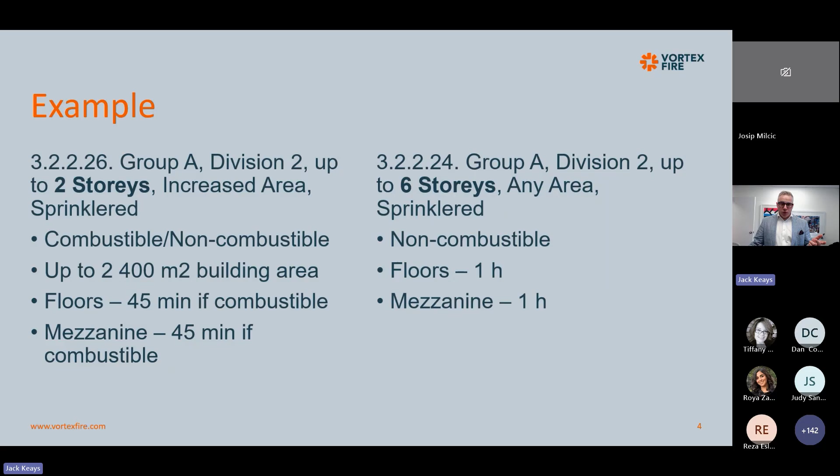Whereas if that mezzanine level was actually classified as a story, it would put us into 3.2.2.24, which would mean we'd have to do non-combustible. It might be okay, it might be doing that anyway. And the floors would go up to 1 hour, and the mezzanine would also go up to 1 hour. So it's an increase in the fire resistance rating.

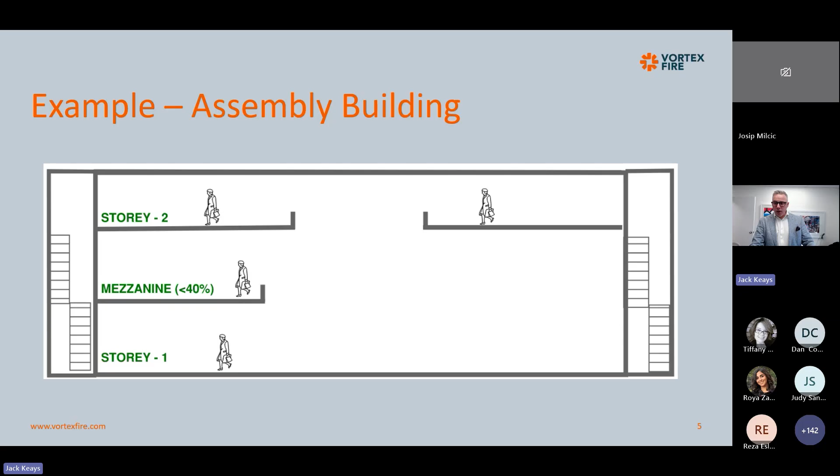Also, this gives us the interconnected floor space consideration. If you have a floor area like this, and we've talked about interconnected floor spaces in different presentations, one of the things that can happen is if you have more than 2 floors open to each other, you'd trigger the interconnected floor space requirements. In the new OBC, that would be quite significant if these were considered stories rather than a mezzanine. Then you'd end up having to do all the protection of the stairwells and all the different things we've talked about in that presentation - it's available on YouTube if anyone wants to go back and look. That's an example of why, as designers and builders putting these buildings together, we would actually try to classify an area as a mezzanine.

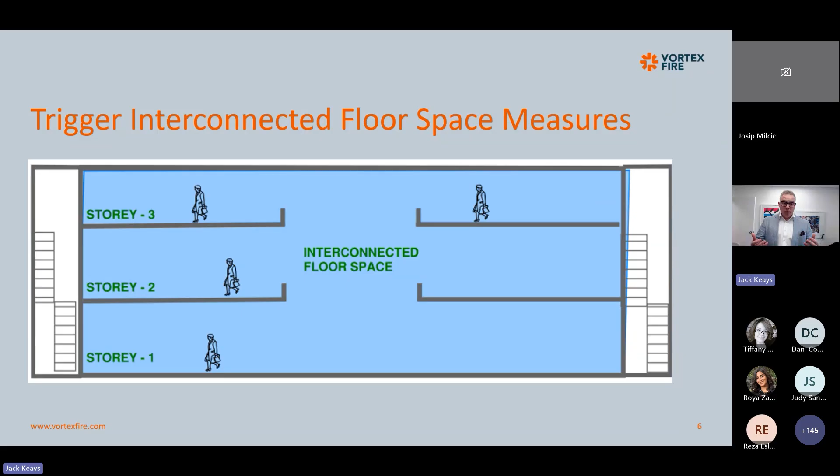Okay, so we talked about the pros and cons. The pros are the reduced fire rating, the permitted combustible, non-combustible construction, and no interconnected floor space protection. You could potentially get rid of those or reduce those.

But the cons are we are limited in areas: 40% for open mezzanines, which we'll get into, and 10% for enclosed. One of the key things is you actually have to be able to see the floor area below. So there are limitations on what we can do, but it does have some upside.

We'd often see these, for example, in restaurants, mezzanine levels in restaurants. You can add it into a building without increasing the height of the building in terms of number of stories. It's very common in industrial applications where you may have office areas that are subsidiary to the industrial space that actually don't trigger the requirement to be a story in building height as well.

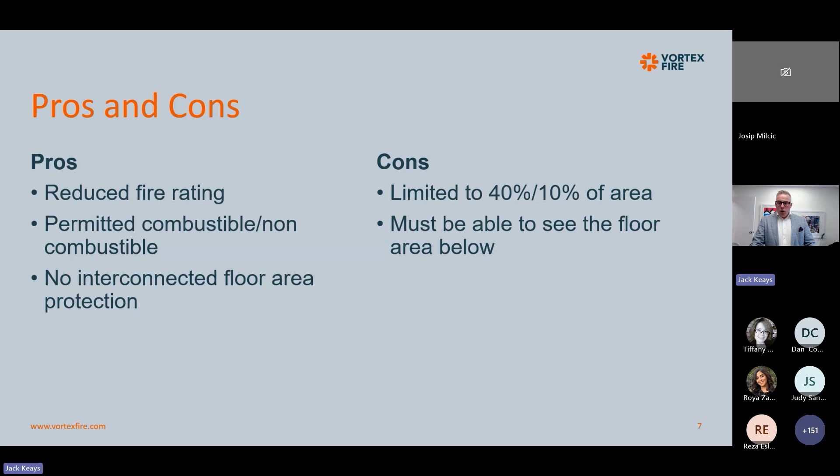Okay, so with that, we're only 8 minutes in, but Tiffany, can you run the first poll on this? So the first poll question is: what are the main benefits of classifying an area as a mezzanine? There are 4 options: reduced construction requirements, potential reduced exiting requirements, doesn't count as a story in building height, or all of the above. Please choose the most correct answer. I'll give you about 30 seconds to do that.

And Tiffany, if you can let us know how we're doing. All right, folks, please complete that poll on your screen. Right now, it looks like the answer with the most responses is at 88%. We have all of the above. Yeah, excellent. Okay, very smart group here today.

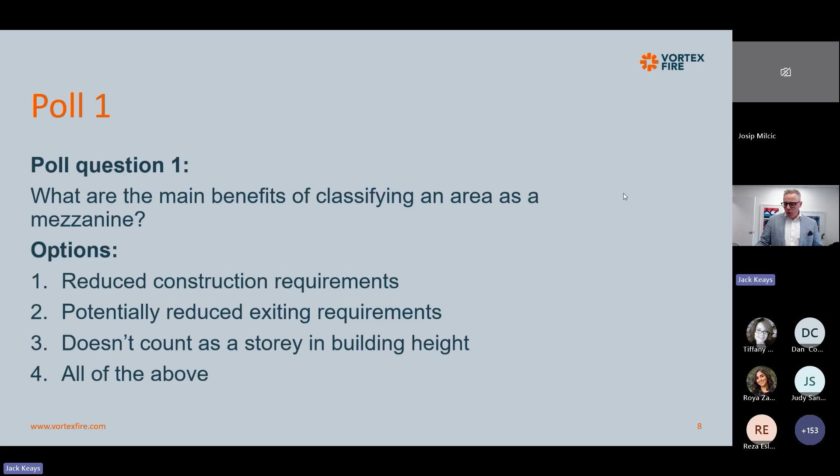Okay, so what is a mezzanine? We just want to talk about some of these definitions before we get into some of the nuts and bolts of the changes. And for anyone, maybe there's some young designers or new designers new to the industry on here as well, who we'd want to talk to, I'll just explain what this is.

So when we say floor area, this is important because when we get to the definitions and how we measure floor area, it's actually the perimeter of a building. So it's between the exterior space, the whole perimeter of a building. When we talk about this, for example, in some mezzanines we base it on floor area, in other ones we base it on the size of a room. So this is one to be aware of: it's the whole perimeter of a building.

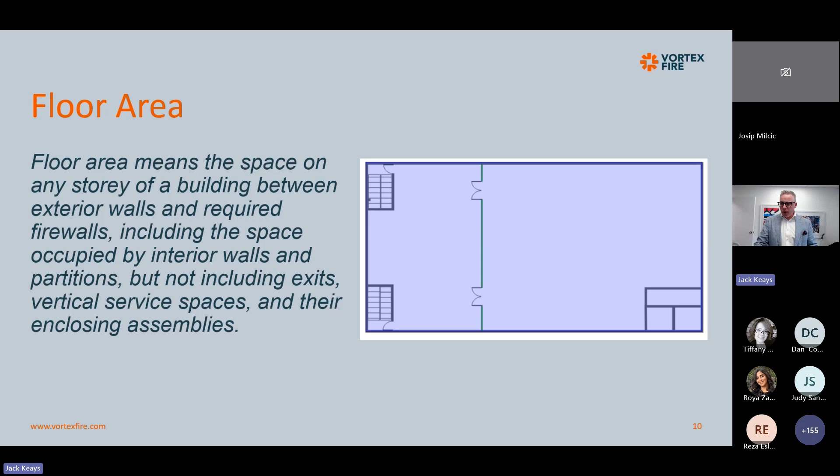The next one is in terms of suites. Suites comes up as well, so we want to talk about suites. A suite is, for example, say a whole group of offices or a strip mall situation where each one of these is an individual suite, because there are limitations on how we can arrange suites with the mezzanine requirements as well.

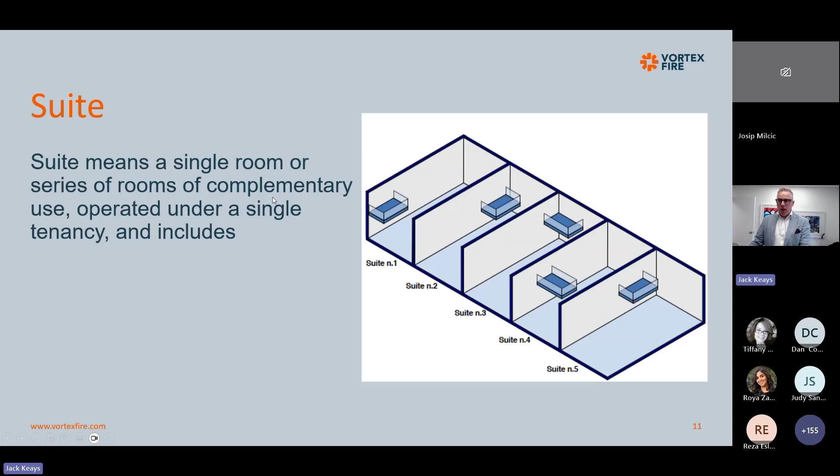So this is just some of the background, so that allows us to kick on and talk about the actual mezzanines themselves. It comes down to 2 key things: there are open mezzanines and closed mezzanines. For example, an open mezzanine is 40% of the room it's located in. A closed mezzanine is 10% of the suite.

So that could potentially be the whole floor area of a building. For example, if you have a large industrial building, it's 1 tenant, 1 suite, so they will get the whole 10% from the whole suite, whereas the open area is actually the room it's located in.

It talks about, for example, an open mezzanine. It's the aggregate area, so you can have more than one mezzanine in a room that's not superimposed, and it does not exceed 40% of the open area of the room in which it's located. This is very important for open mezzanines, to understand that it's the open area of the room they're located in, not the entire building.

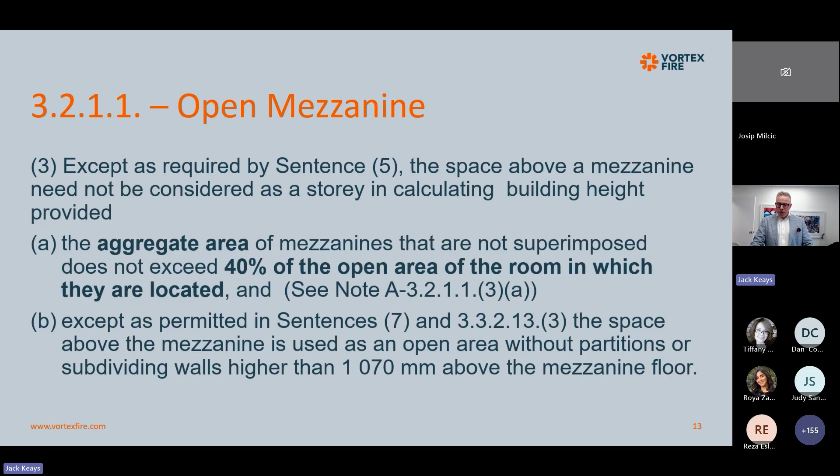The other restriction is that you can't have any obstructions that are more than 1070, which matches up with the height of a guard, between the floor area of the mezzanine and the floor area below. So that's one of the restrictions: when you want to do an open mezzanine, you have to be able to see the floor area below.

So this gives you an example of what a mezzanine would look like. You're standing on the level above, you're able to freely see down and understand what's happening. This is part of the code allowance to do this, where you can fully see what's going on. If something happens on the floor area below, you're made aware of it very quickly, and you're able to egress off that mezzanine.

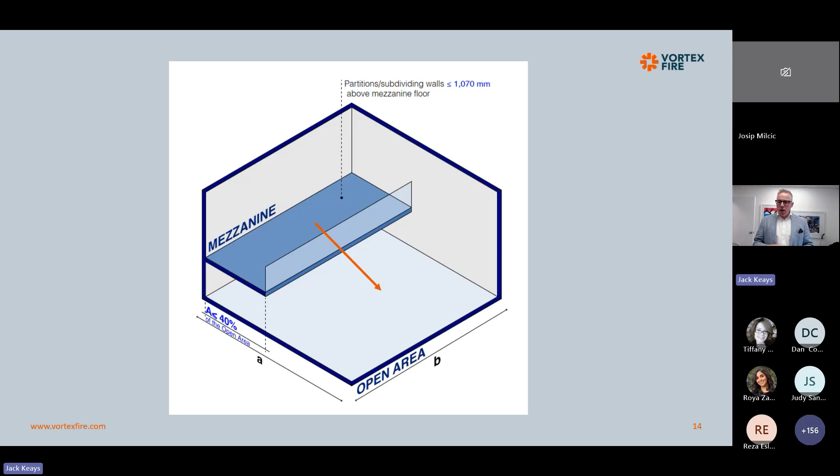So this is 40% of the area of the room. This is when we talk about having multiple mezzanines. You're actually allowed to have more than one mezzanine within that room, however the total still can't go over 40%. It's still limited to 40%, but it's based on that room alone. You can have 10 mezzanines, or one big one, do whatever you want, just can't go over that 40%, and they have to be open.

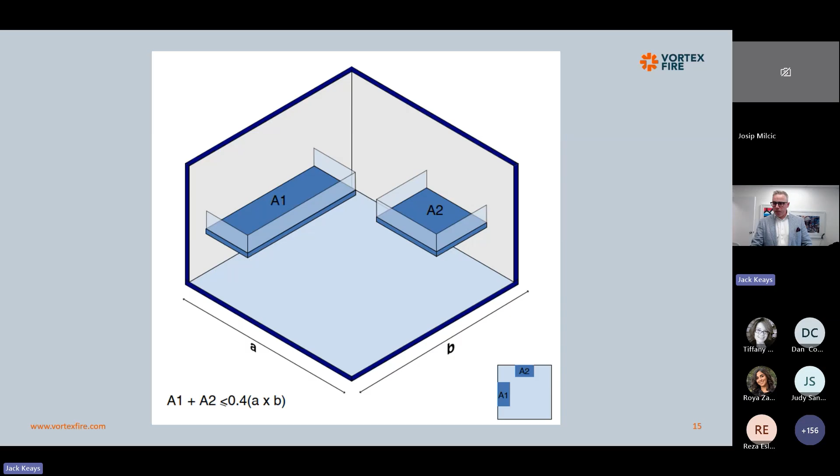So then we get down to the closed mezzanines. These are a small bit easier in terms of construction because you're allowed to have walls. However, you're not allowed to exceed 10% of the floor area of the suite.

So it's the same thing again, the aggregate area of the mezzanines. You can have more than one closed mezzanine, not superimposed, that does not exceed 10% of the floor area in which it's located. This goes back to the floor area I mentioned. For example, if you had a large industrial building, you could take the whole 10,000 square meters, and take 10% of that. Now that would trigger another issue, which we'll go into.

But the other one is the area of the mezzanine is based on the suite. So two things: if you have more than one suite, it still doesn't allow you to take all the area from the other parts. It still can't exceed 10% of the suite.

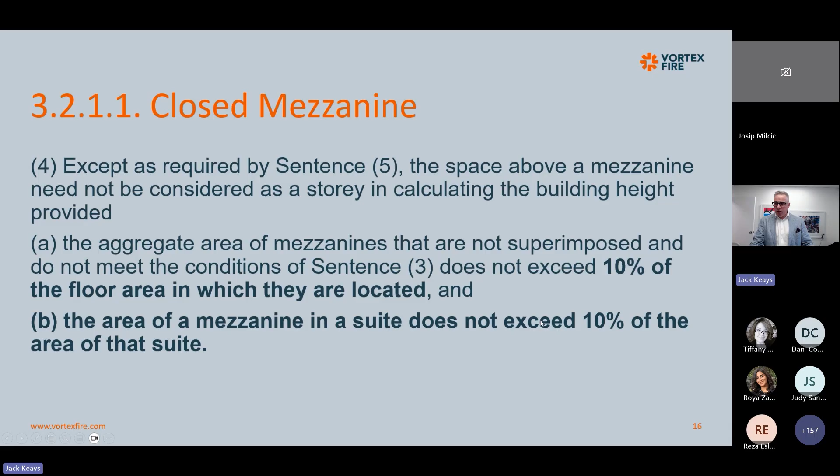So this would be an example of a closed mezzanine, and the reduction in area corresponds with the reduction in actual visibility. The code says, hey, you can't see down, but still only get 10%, since it's not as risky as having a full story. So we're going to give you some dispensations. However, you're only going to get 10% of the floor area because you can't see down.

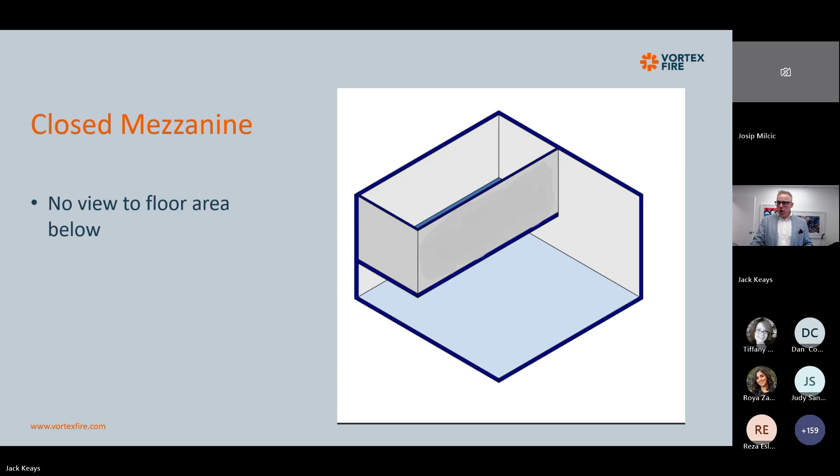And then we get into this example, which is the situation where you have multiple suites. We've dealt with this a number of times where you might have individual tenants in, say, retail or office spaces, some condominium offices, things like that. And they would come to us and say, hey, I want to put a mezzanine in.

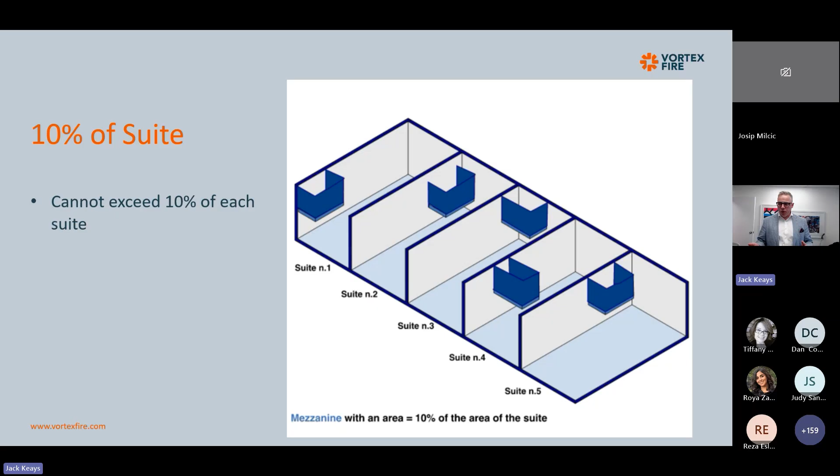No one else in the whole block has a mezzanine. Can I have 10% of the whole area? And we're like, no, unfortunately, you can't. It's still limited to 10% of the suite in which you're located. You have to follow that. So this is where it comes in: you can have one in every single unit, just not an individual unit taking more. It also allows for, in the future, if anyone comes in or out, that they're not limited by something being taken by another unit.

This is the same example for our large industrial buildings. We mentioned that in large industrial buildings, if you've only one tenant, it would be 10% of the floor area. This could be a situation where throughout the building, you might have different supervisory offices, for example, over some of the production space. You might have even service rooms, different things, or other space. So they can't exceed 10% of that floor area, but it's based on the entire footprint of the entire building.

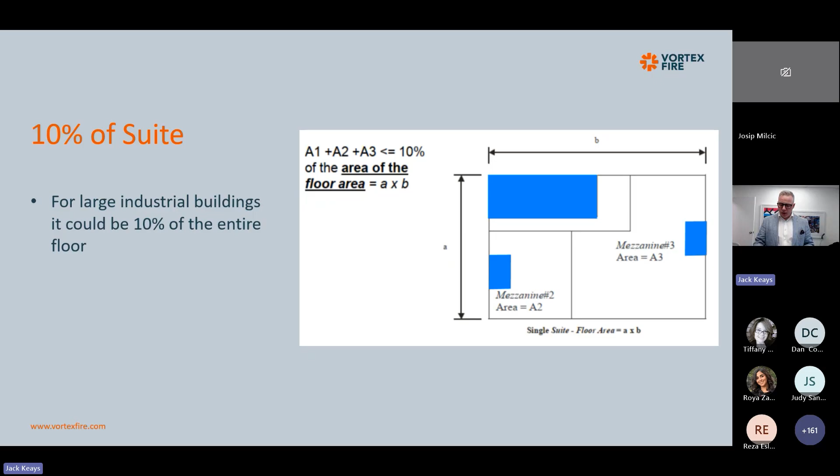Just one thing, when we talk about superimposed mezzanines, you can't do one mezzanine above another mezzanine. In this situation, the mezzanine above would be considered a story, or one of them would definitely be considered a story, because you can't do one above another. It doesn't allow you to tier them up that way. So let's just be careful with that. I don't think I've ever seen anyone try to do it, but it's in the code, so someone must have tried to do it.

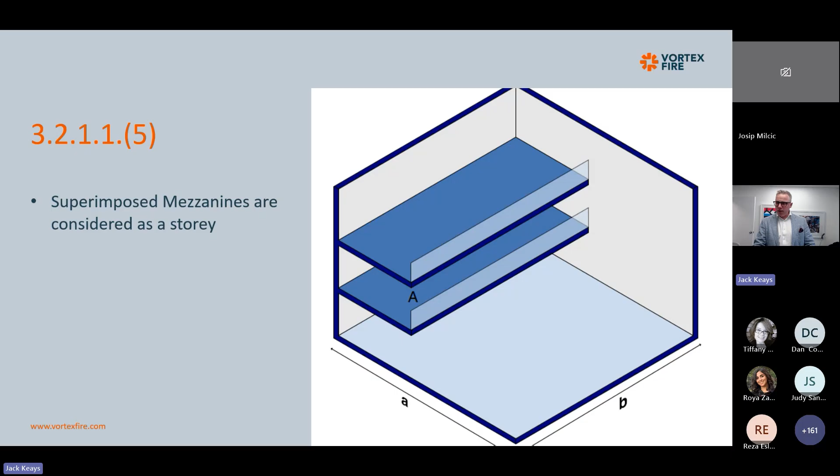So this question, guys, goes back to some of the fundamentals of what a mezzanine is. If a floor area has full height walls, so floor to ceiling, and is more than 10% of the area of the suite in which it is located, can it be classified as a mezzanine?

All right, folks, if you can please submit your answer using the poll. Just giving it another couple of seconds here. Right now, the strong winner is sitting at 86% no. Okay, very good.

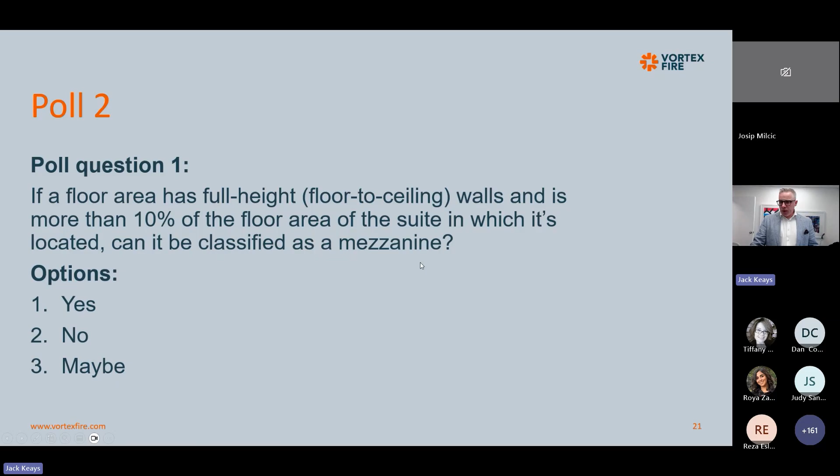Okay, so we're going to get into it now. So what has changed with the OBC? As we've mentioned in previous sessions on changes to the Ontario Building Code, a lot of the changes are about harmonizing the Ontario Building Code with the National Building Code of Canada. For a long time, we had many made-in-Ontario specials, different things that addressed different issues or were left over from previous codes. So what's happened is the harmonization has taken place. We've taken all the National Building Code requirements, however, they're a bit different from time to time from what we did before, so we have to adjust.

We've had to adjust with some of the other requirements that we've run through already on interconnected floor spaces and things like that. And this is one where we've got a little adjustment to make as well.

So one of the key changes, this was brought up in the interconnected floor space discussion as well, was on the actual new requirement that says that if you go over 500 square meters in a mezzanine, you have to enclose it. So where this could impact you is if you were planning to do an open mezzanine, but next thing you hit 600 square meters, it doesn't matter, you have to enclose it.

That sends you back into a loop where now you don't have the view to the floor below. So you actually don't meet the open requirement and you're back in an enclosed requirement. So it's just something to remember that once you hit 500, you have to stay under that to not have to enclose it. So you could end up triggering some of the requirements to actually be a floor or a story in building height if you go over this area. So it's something to be aware of.

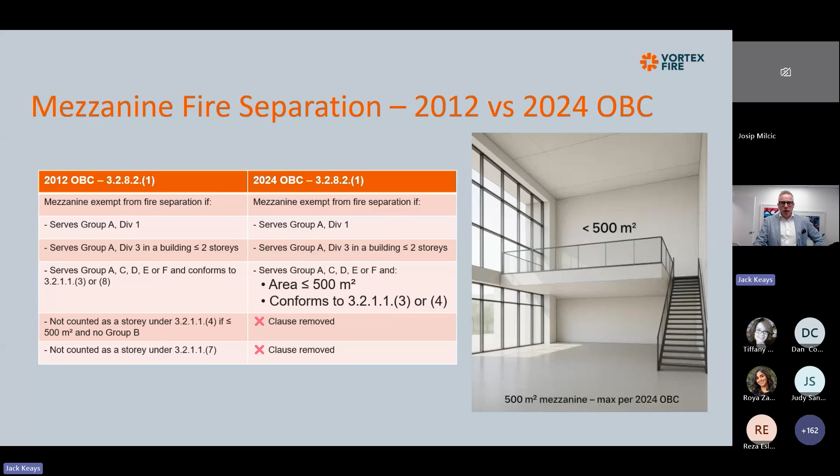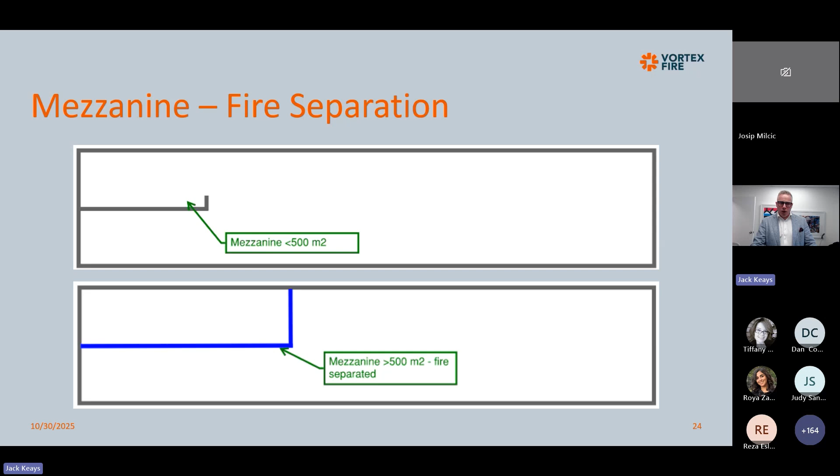So this is the example. Under 500 square meters, you're fine, you're good to go as an open mezzanine. Over 500, no matter what you do, you still have to enclose it. So this would come up mainly, this size of mezzanine would probably only be seen in industrial applications. We don't come across too many of these in other office or assembly buildings.

So that's the impact for designers. So we get into this, this is where the main changes actually happen. This is in 3.4.2.2. I put the previous OBC and the new OBC beside each other just so we can get some understanding of some of the changes. In terms of how the code looks at this, they've changed the wording of sentence 1, but there is actually no particular fundamental change in this sentence. What they both pretty much say is that if you have a mezzanine, the mezzanine should be provided with exits the same as a story, unless it meets any of the exemptions. So it's like follow the standard floor area or story requirements unless you meet the exemptions.

So, for example, this is what it would look like. No matter what size your mezzanine, the starting point would say you need 2 exits. You need to meet travel distance, all that.

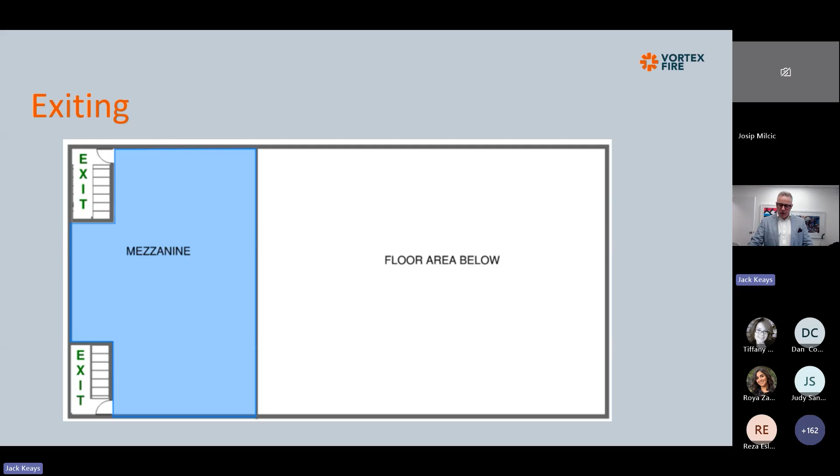You measure travel distance to the exit door as typical standard requirements for this. That's your starting point, and then you start to peel back that depending if you meet the exemptions or not. So the next sentence has got this - it's actually taken out. This was the exemption before that said it waived sentence 1, and it's gone out of the new code. The previous code said a mezzanine need not conform to sentence 1 provided it does not require to terminate a vertical fire separation. However, when you went back to the vertical fire separation, it didn't have the 500 square meter limit - it only had the 40% and 10%. So this has actually gone out of the code. It's a bit of a change in terms of how we do it, but it is what it is.

So we're going to move on with it. In terms of this, this is the biggest section that addresses exiting, and this is 3.4.2.2 sentence 2. Within this, it talks about one of the exemptions of the means of egress, and we're going to go through them one by one. There's the actual area, which we just mentioned. There's the occupant load, the actual area of the mezzanine, travel distances, and how we measure those travel distances.

For this example, the means of egress for the mezzanine need not conform with sentence 1, provided the mezzanine is not required to terminate a vertical fire separation. So we're going to assume our mezzanine is under 500 square meters, which we've discussed.

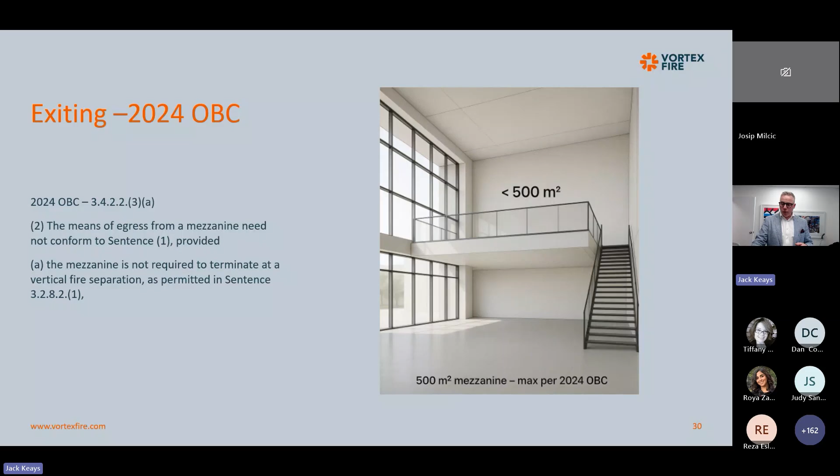The second one is a bigger one - this is a new one. If you go over 60 people, you don't get the exemption. Unless there's an exemption further on, but at 60 people, you can't just use the open staircase like we were able to use before. You have to actually go ahead, and there will be at least one exit on the floor area.

The next one is the actual size of a mezzanine. So you'll see this - this is a reference to table 3.4.2.2. A means of egress is allowed to have reduced exiting, for example it's allowed to use open staircases for exiting, provided it meets the area limitations of table 3.4.2.2. This table, in my opinion, is very, very restrictive. The actual areas in this, by the way, match up with what we'd be allowed to have in an unsprinklered room - they're the same size areas.

So, for example, an assembly space of 150 square meters - that's actually only 15 by 10 meters. It's not a very big space. Might be okay in some small infill restaurants, but in the bigger scale things, it's not a lot of space. Residential, we don't typically see many mezzanines anyway. Business, we might see them more often at 200 square meters, so that's quite a small area as well.

And if you think of the large industrial application, that would be very easily eaten up at 200 square meters, 2,000 square feet. Mercantile as well - it might be okay if it's smaller units, but in bigger units, the same. And then the industrial applications as well. Typically, when we work on large industrial buildings, they're much, much bigger than this, and therefore would not meet the provisions to be allowed reduced exiting.

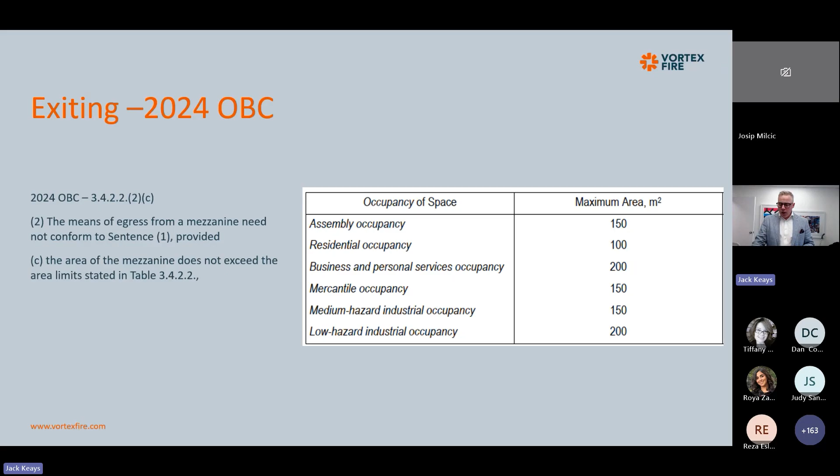So that's one area. The second area is the travel distance. Within the travel distance, it's the same thing again - they've given us new limitations on the travel distance. The limitations, again in my opinion, are incredibly restrictive. 15 meters is very, very short, especially if you think back to the restaurant example.

Take a restaurant, and 15 meters will get eaten up pretty quickly once you start going around tables and obstructions. Residential, not so much. Same with office - 25 meters is also not so bad for office, but it's still pretty short. And anyone at 10-15 meters, like 10 in a medium hazard industrial - most manufacturing facilities, for example, would probably fall into medium hazard if they're dealing with plastics or things like that. So your distance is very, very short in those cases. You're really going to trigger having to go and actually put in some exiting, more like a floor area exit, and not the reduced requirements we would have seen before.

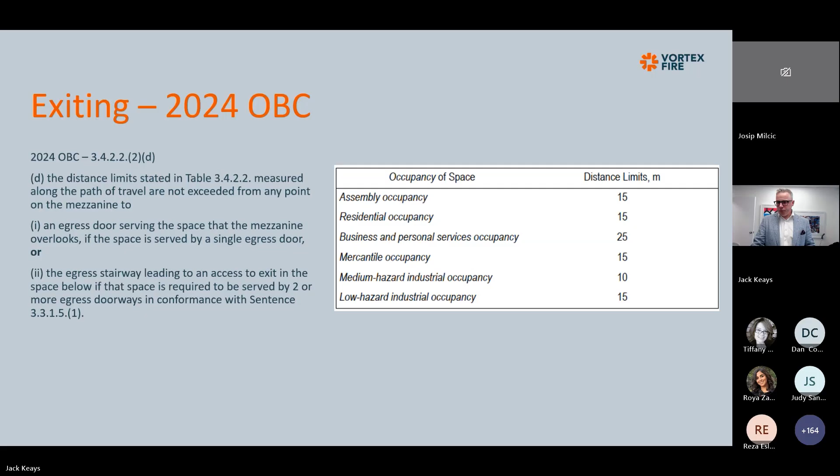So then we get into how we actually measure in these situations. We go back to the measurement of how we treat the distance out of the space. This talks about when you only have one door from the floor area. So if you've got a mezzanine within a room with one door, remember I mentioned that if you're in an assembly space, you only have 15 meters. So now, based on only having one door, you only have 15 meters from the back here, across, down, and out of the space. That's probably not going to get us out of the space.

Realistically, most mezzanines we would deal with would be a lot bigger than that. Unless you were bringing people down the back and sending them out the back, you might be okay. But in general, this would be very, very tight for most of the types of buildings we would see. So that's a very restrictive requirement as well.

So typically then you'd end up with a situation where you're allowed to actually measure to the top of the staircase, which is what we would have done before. We're allowed to measure to the top of the stairs, but we still have our two doors now, so that's a bit better. It gives us options to go left and right, two directions of travel once we come down. That does help, but it just means you have to have at least two exits from the room in which the mezzanine is located.

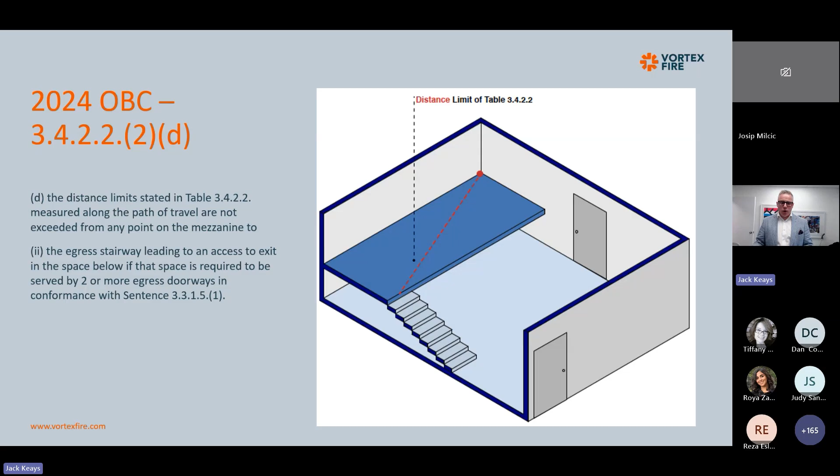Realistically, if we're going over 60 people, we're going to need that in the room anyway, which probably in an assembly space we're gone over. So maybe it's not that big of a deal, but it's just something to remember. Maybe in office spaces, it's not quite as clear cut in terms of that area and having those second means of egress.

This gives you an example. If we're dealing with a very restrictive travel distance, such as assembly occupancies, you may end up having to add a second open stair. Now you're still limited to 60 people, but this would help you meet the travel distance, and would also allow you to get the area a bit bigger and meet the egress requirements out of the space.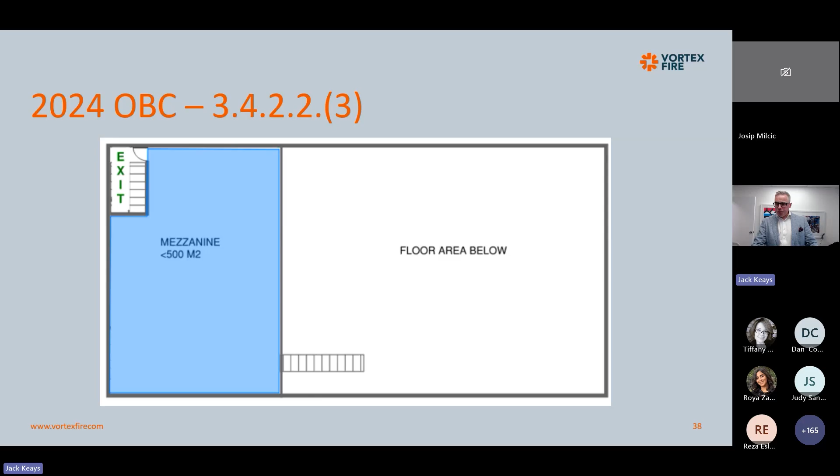So this is an example if you were in a larger industrial building, where we would have a mezzanine that now exceeded 500 square meters. Okay, it's still a mezzanine. So for example, if you were doing a 10% enclosed mezzanine and the floor area is 10,000 square meters, that means 10% of that is 1,000. We have a mezzanine, say 600 square meters. We have to enclose that mezzanine anyway, but we still have a fire separation there. We can't use a convenience stair as part of the means of egress.

We have to provide two exits on that floor area, on the basis of the mezzanine being the size it is and being required to have two exits.

So when you get to this situation, the only real benefit of calling it a mezzanine is back to the construction requirements, because the construction requirements would still be a two-story building, for example, even if you had a floor above it, or it might be a one-story building. So that would be the benefit of it. But in terms of exiting, it's back to looking like a normal floor or a normal story, so there's not a huge amount of additional benefit on this one.

Just on this, before I go into accessibility, one thing that comes up that I should have put a slide together on is this is all well and good if you're putting your mezzanines around the edges of a building. We deal with certain manufacturing facilities, large ones down around Kitchener, Waterloo, Cambridge area, where we've done alternative solutions with mezzanines in the middle of the actual building. So with the new code change, this is going to make some of those mezzanines quite difficult, or they're going to have to be subject to an alternative solution.

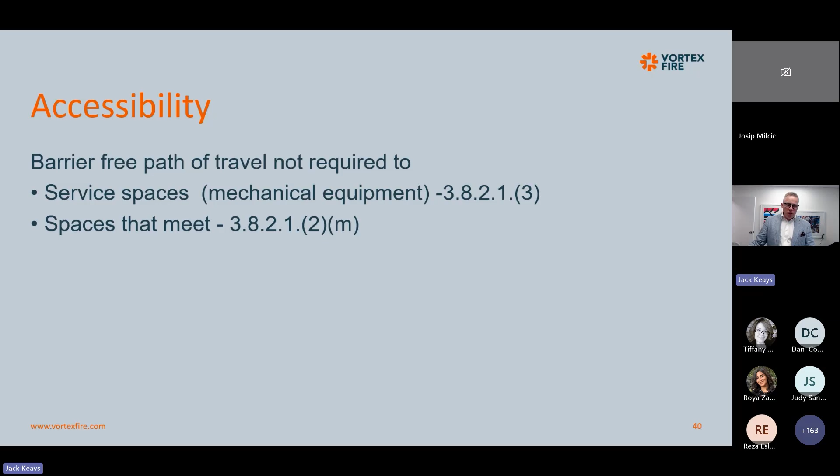So one of the other code changes that's happened is the change to accessibility. There's always been some exemptions for mechanical space and service spaces and things like that. But one of the new ones is this 3.8.2.1 sentence M. And with this sentence M, I'm going to just go to it here and show you - it talks about when you need to provide barrier-free access to a floor level.

So, for example, in a building, if you have a mezzanine, and on that mezzanine you had service space, it would likely be exempted - you wouldn't have to provide an elevator to it. However, on the same facet, if you had a mezzanine and the washrooms for all the staff were on that level, yes, that mezzanine would have to be barrier free. Or if it goes over 600 square meters, or if there's any facilities up there that would be needed that are not provided somewhere else in the building that is barrier free.

So this is 3.8.2.1 sentence M. There are a lot of nuances to this, and you have to give consideration to how it's actually being used - is there anything up there that would not be available on the floor area below to people like staff, or to people working in the building, or visitors, or whoever is in the building? You shouldn't have anything up there that would reduce the level of what's available to people on that floor. And I think the appendix note - I'm really happy with the appendix note they put into this.

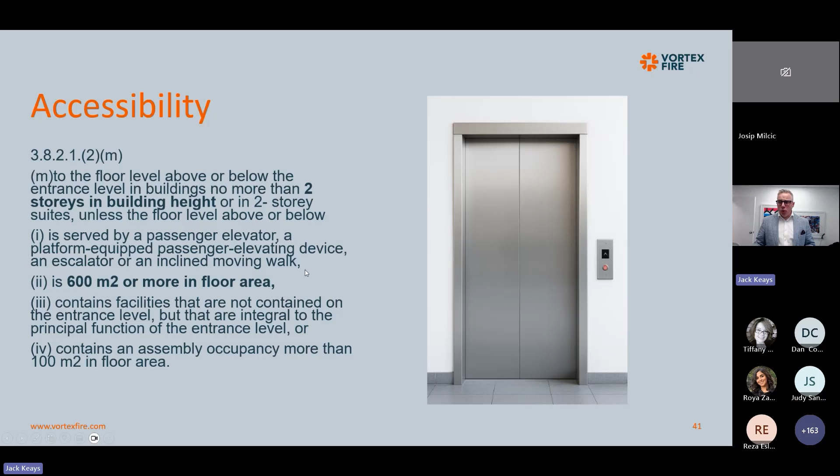Now, an appendix note is not part of the code - it's not actually a mandatory part of the code. They're put there to help us understand it. But this one I feel has done a pretty good job at saying, hey, we don't have to put an elevator to every mezzanine. For example, it talks about mezzanines as long as they're not over 600 square meters - 100 square meters if it's assembly. So in restaurants you get less, or in assembly spaces. And it goes through why you'd be allowed to do it - for example, for small offices in the second story or small restaurants. And that's the concept.

It goes further to explain if the restaurant's only washrooms. It talks about basements, but in general things like lunchrooms. This is one area where the code has done an update, and it's one to watch out for in your designs, because we often get people asking, do I have to provide an elevator to a mezzanine? It's not a story. Our answer would be, it's not exempted unless it meets these criteria.

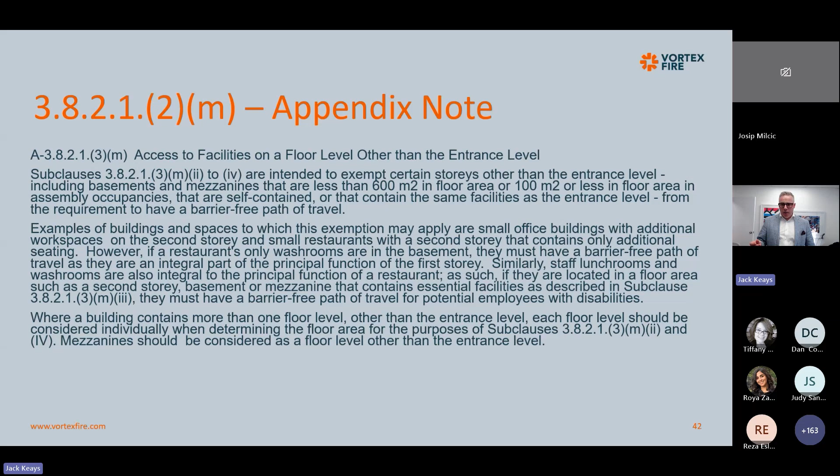There was a lot of ambiguity in the previous code about smaller office spaces or smaller areas. This is one where the code has done a pretty good job updating and providing clarity around the actual intent and what the code wants us to do. So here are some examples.

If essential facilities like washrooms or staff rooms are located on another floor, they must have a barrier-free path of travel. For example, a small office with workstations on the upper floor might be exempted if all the facilities are on the ground floor - other offices, lunchroom, washrooms - and you didn't have meeting rooms upstairs. Same with a restaurant: if you had additional seating on a mezzanine, you may also be exempted, provided everything was on the ground floor and barrier-free.

One thing on this: the code says a barrier-free path of travel has to extend around the entire ground floor of a building. The appendix note confirms this was not intended to apply to mezzanines within that floor. Obviously this still has to meet the functionality requirements I've been talking about, but that's one area where the code has provided clarification.

The other case would be where it would not be exempt - a restaurant with washrooms on the mezzanine would not be exempt, and staff lunchrooms or employee facilities on the mezzanine, same thing, not exempt. In terms of questions about this, it's very hard to be generic - you really have to look at what exactly is happening and where everything else is. But there is some more leeway in terms of making some of these mezzanines barrier-free.

That said, if you have an elevator in the building and it does stop at the mezzanine level, it is required to be barrier-free. So it's not like you can put washrooms up there when you have elevator access and then not make them accessible - that's not the intent. But if you don't have an elevator, this is when it would waive the barrier-free requirements.